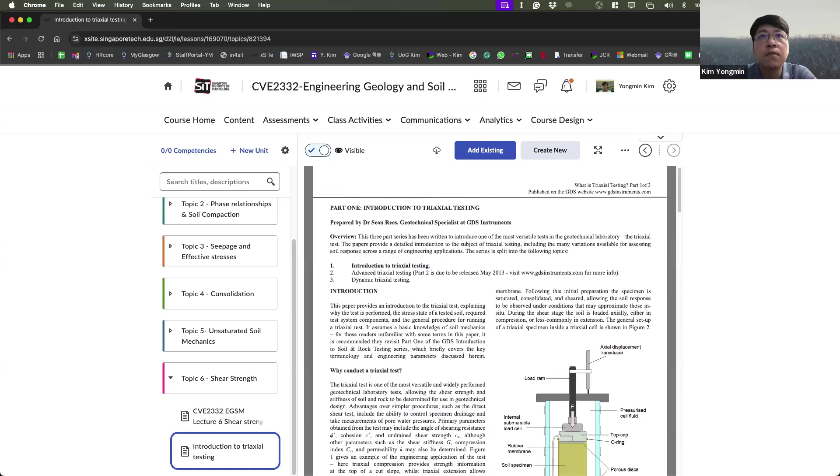Okay, let's begin our new topic: shear strength. So my question is, why do we care about shear strength most? Shear strength is one of the most important soil properties to control soil behavior in mechanics. This shear strength is required to estimate bearing capacity.

The shallow foundation failure mode looks like that, like sliding, right? And slope stability, this way, this way, this way. Tunneling and retaining walls all fail in a shear mode, shear failures. So this failure can be determined by the shear strength of the soils.

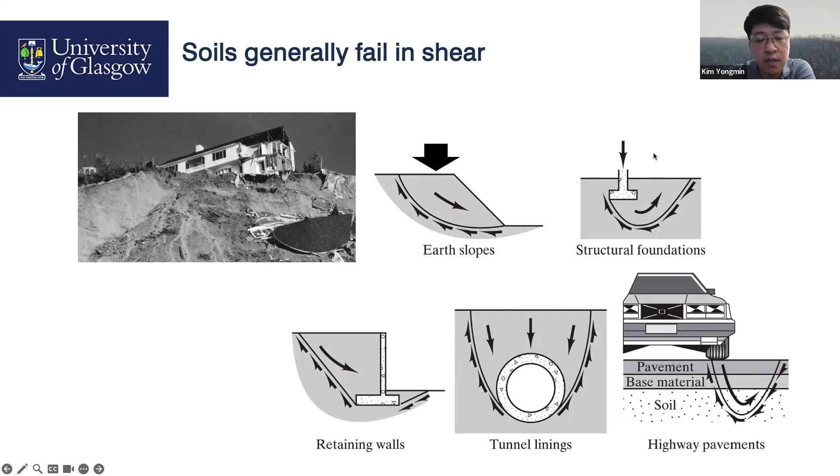Later on, we can take a closer look at this area. And then a very interesting thing in soil mechanics is the totally different behavior in soils compared to steel and concrete. This soil failure can be determined by shear strength with the incorporation of pore water pressures. But steel and concrete don't have any additional components to consider in their strength parameters. So steel and concrete behavior is very expected, but soils are quite unexpected. Uncertainties, we have a lot of abnormal behavior due to pore water, pore air.

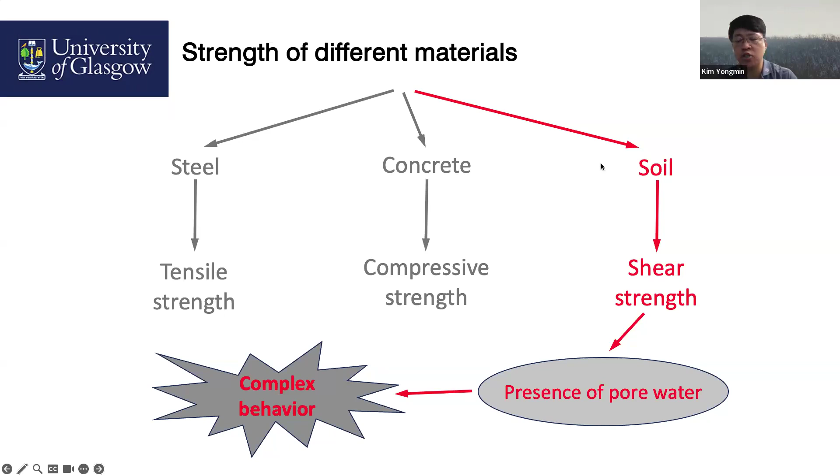So soil's shear behavior and shear strength is quite complex. Let's take a closer look at the failure surface. This is a theoretical failure surface and these are actual failure surfaces. Our geotechnical structures always fail in this way.

So you can see this resistance force against driving forces. They are in opposite directions. This soil mass tends to move this way, sliding, but the other way we have resistance force in the opposite direction.

Once they are balanced, this slope and this footing are very stable. But if the driving force is greater than the shear resistance, unfortunately, this slope and footing will fail.

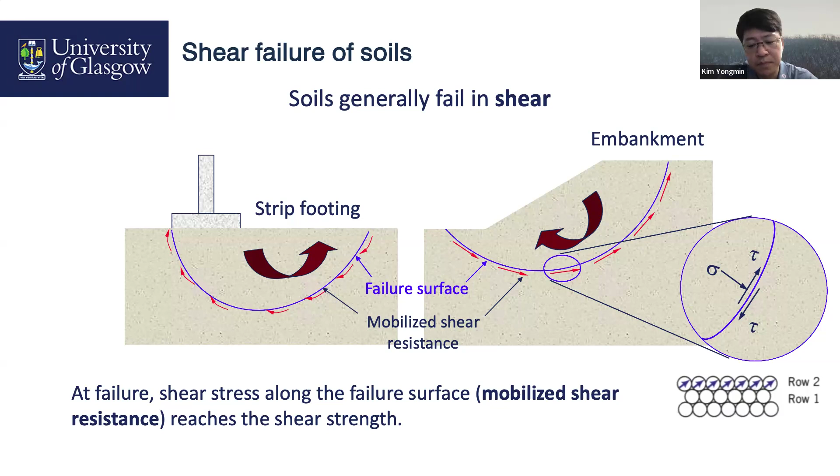Another geotechnical structure: the retaining wall. Yes, the next module of geotech is the geotechnical engineering module. You will learn about the design of retaining walls with respect to earth pressures.

This is soil, and this soil has self-weight. Sometimes we call this soil pressure, or earth pressures, acting on the retaining wall vertically and laterally. This retaining wall should resist such stresses and pressures.

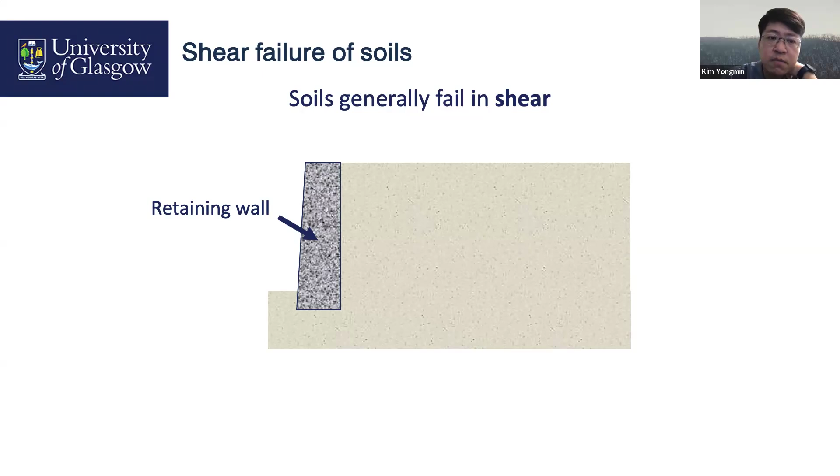Right now, the retaining wall resists certain loads from behind, horizontal earth pressures. Very safe. But due to external load, due to rainfall, or excavations, the retaining wall moves and shows shear failures, something like that.

This is a failure plane, and this is the driving force, and this is the resistance force.

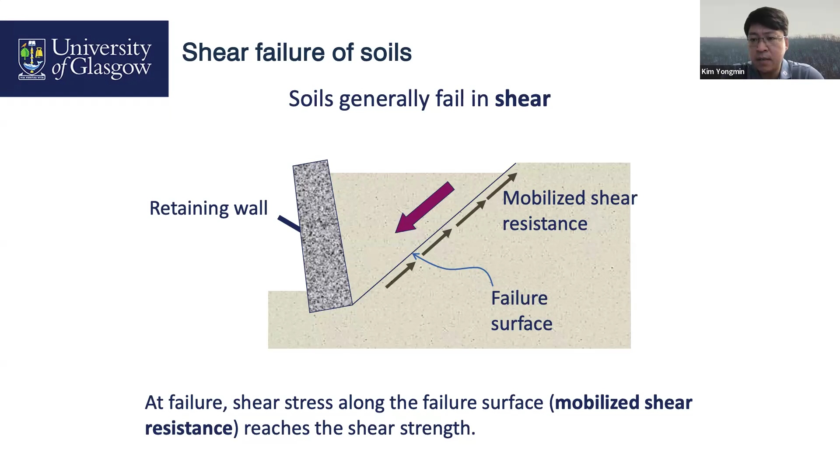Hi Prof, has this really happened in real situations? Yes, yes. I'm not very proud to say that if we don't really understand the earth pressures and certain retaining wall design and soil mechanics properties, major incidents will probably happen like this.

Inside is our construction site, outside is the residential area. But for some reasons, the retaining wall collapsed. It means these retaining wall structures couldn't withstand such pressures coming from behind the soil.

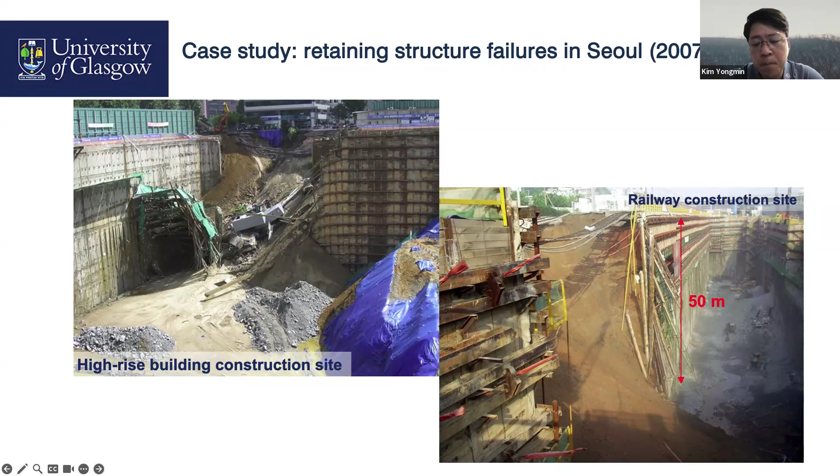We can visualize the earth pressures. This earth pressure looks like geostatic pressure. You know, geostatic pressure is vertical stress, right? Self-weight, your weight acting in the gravitational direction, which is mostly vertical. But horizontal earth pressure is lateral pressure, the resultant force of a triangular vertical stress distribution.

Probably our Korean designers omitted this magnitude of lateral earth pressures. That's why soil's shear strength always governs our safety and geotechnical structure safety.

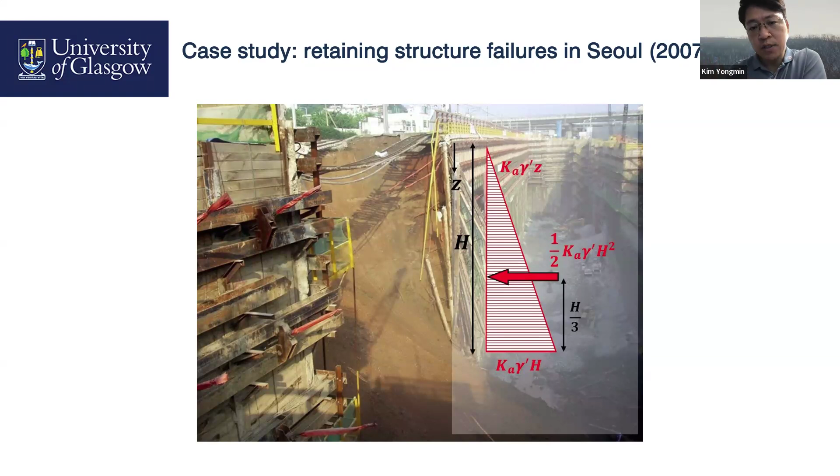How do we measure it? We have certain approaches. Before we explain the different approaches, we need to answer these questions. What did you say when you are asked, is soil a continuum or not?

Now, you attended physics and mathematics, right? All that theory is based on continuum mechanics. But our soil is quite discrete, so we couldn't apply continuum mechanics directly to soil mechanics. So sad. But we just make assumptions: soil behaves as a continuum material.

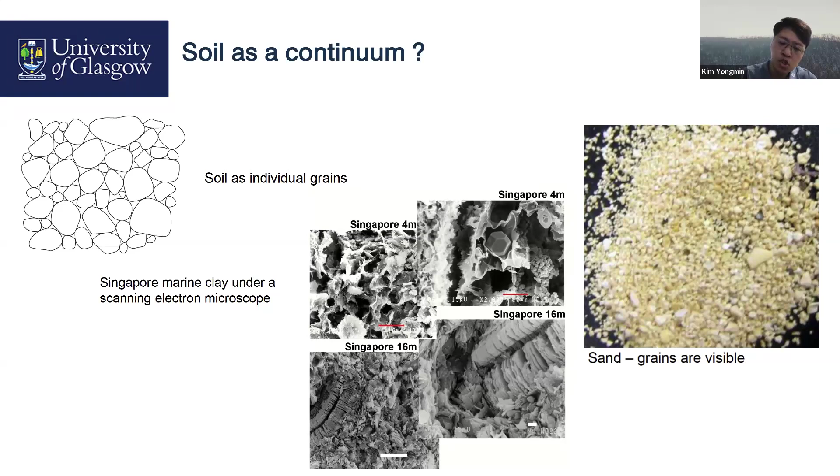In our soil mechanics, this sign convention is quite crucial for consistently defining our stress and deformations. Compression is plus, positive; tensile, tension is negative. Quite different from structural engineering, because our soil only resists compressive loads, and tensile resistance is significantly less.

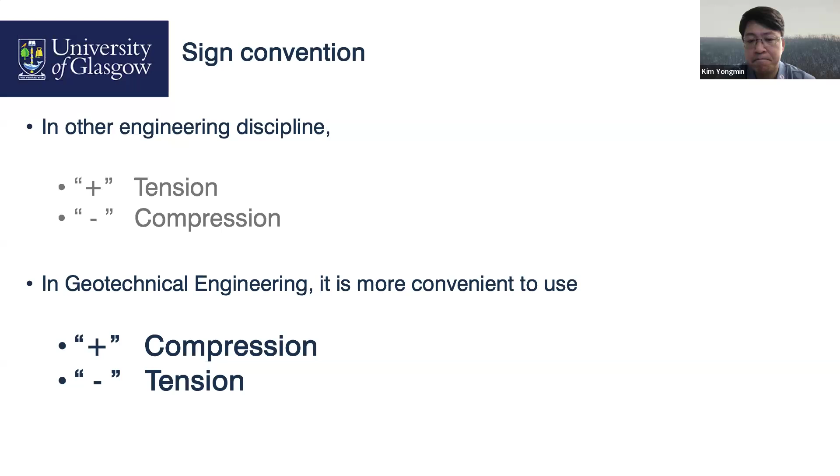So when describing soil's shearing behavior, we need to understand 5 different simple concepts. Don't take it too seriously, just try to understand. First one is

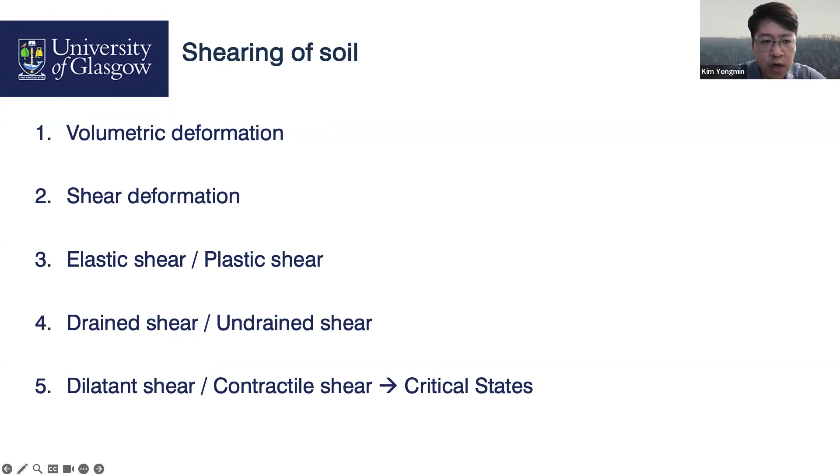volumetric deformations. Volume related deformations.

So just tell me whether this makes sense or not. I dive into a swimming pool. I felt some pressure, which is the hydrostatic pressure, right? And then due to this pressure, my cheeks, my head, decreased, contracted, but my body just remained constant. Does that make sense or not?

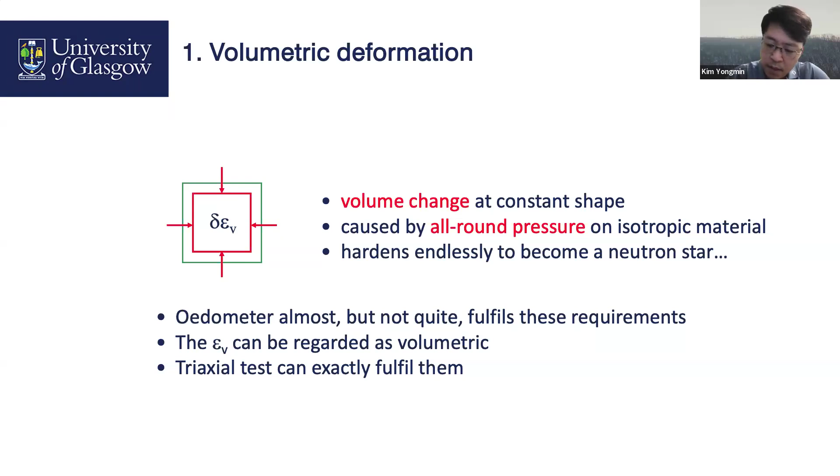Second is shear deformation. It refers to change in shape of the material due to applied shear stress without a significant change in volume. The volume remains constant, but I have a certain shear loading. The face shape is something different. Volume is the same, only the shape is different. In soil mechanics, understanding this shear behavior is essential for analyzing and predicting behavior of our soil under certain loads.

So you can see, apply a particular load, the red one is the deformed shape. How about rotate and press again? Shear deformations.

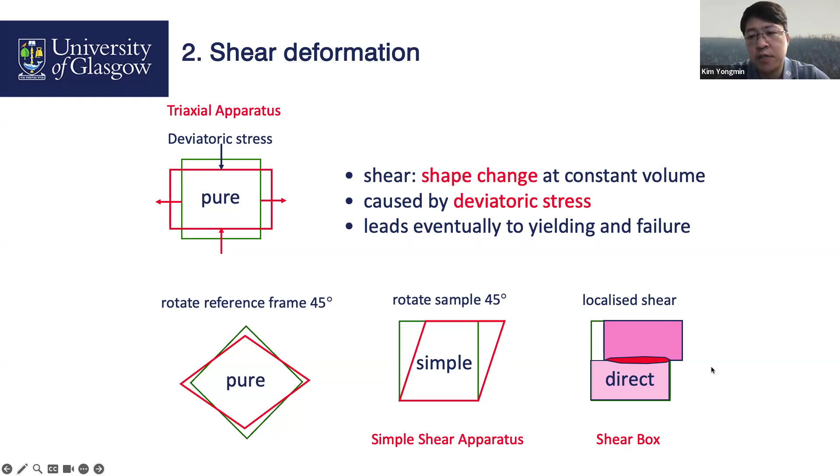This is also part of shear deformation, but in an elastic range and plastic range. Intuitively, you may understand, right? After removing certain loads, elastic behavior recovers back to original shape 100%, but plastic shear only recovers 90%, 80%. It depends on the soil's Young's modulus and Poisson ratio, right? I believe you may understand the elastic and plastic behavior.

You studied this in a structural module, right? Same. Yes, same.

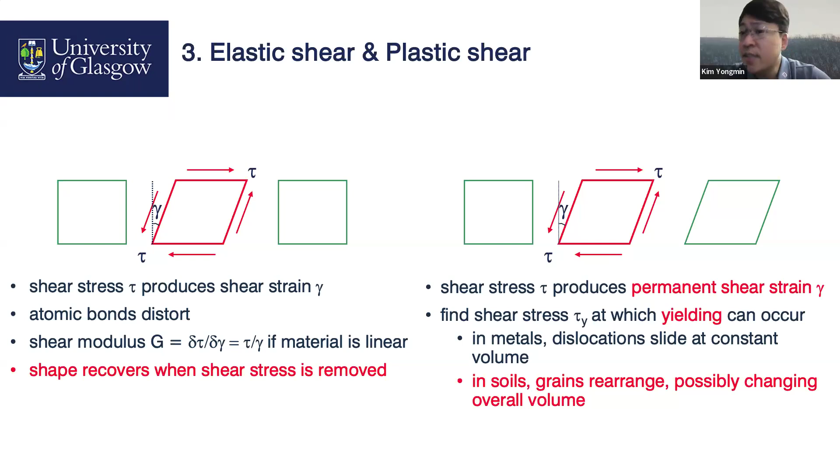And then, drained or undrained. Can you even understand what drained or undrained means? During the life of our geotechnical structure, we have to consider drained and undrained conditions to figure out real behaviors. So the decision on what shear strength parameter to use depends on whether you are considering short-term or long-term conditions. Your structure is temporary, or your structure is permanent.

The drained shear condition refers to situations where you apply pressure and the soil has time to dissipate it during the application of the load. It typically occurs in soil with high permeability or under slow loading conditions. Yeah, quite intuitive. Then we can

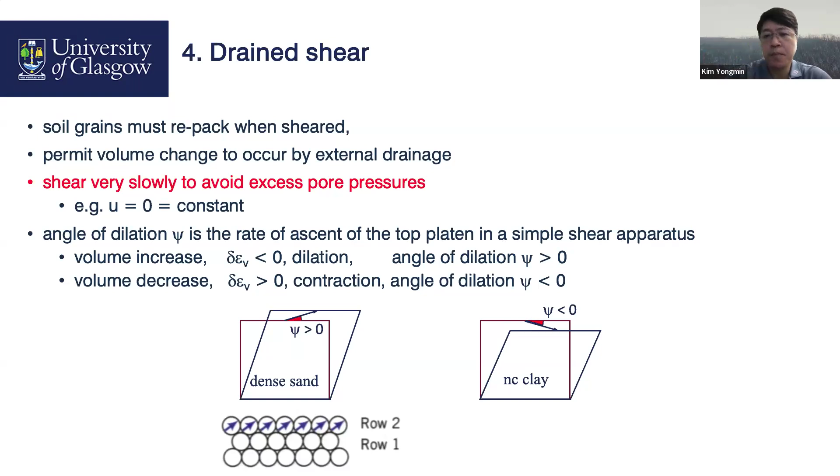On the other hand, in short-term conditions, soil with low permeability does not have sufficient time for the excess water pressure to dissipate. Our marine clay, even if you apply very slow pressure, there will be excess water pressure developed.

No choice, due to low permeability. And if you're loading quite fast, suddenly water pressure develops to resist your shock load. It means that you will have water pressure. That's all. On drained, you don't have water pressure. Undrained, you have water pressure.

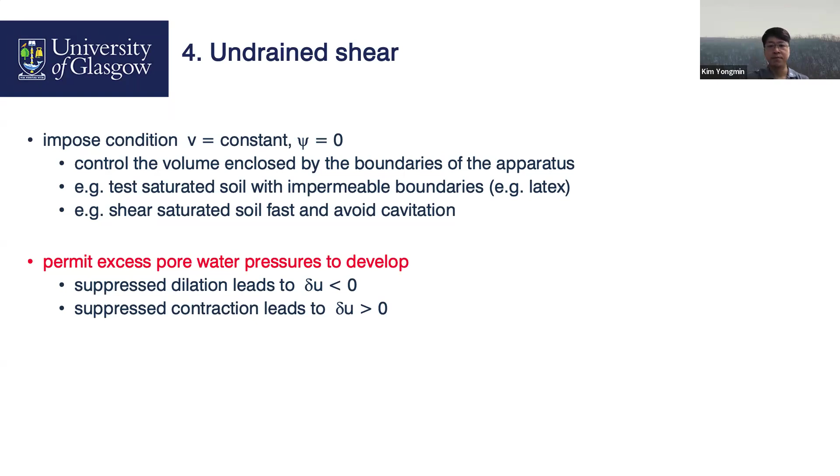Dilation is something like you gain weight, bulk up. Simply, this phenomenon is dilation.

When you take a look at the stress-strain relationship, if the soil's shear strain keeps increasing without any further shear stress increase, we call this the critical state. Your strain increases, but your stress increment is too small. It means the soil has already failed and just keeps failing further and further. This soil around this status is called critical state, a very critical state.

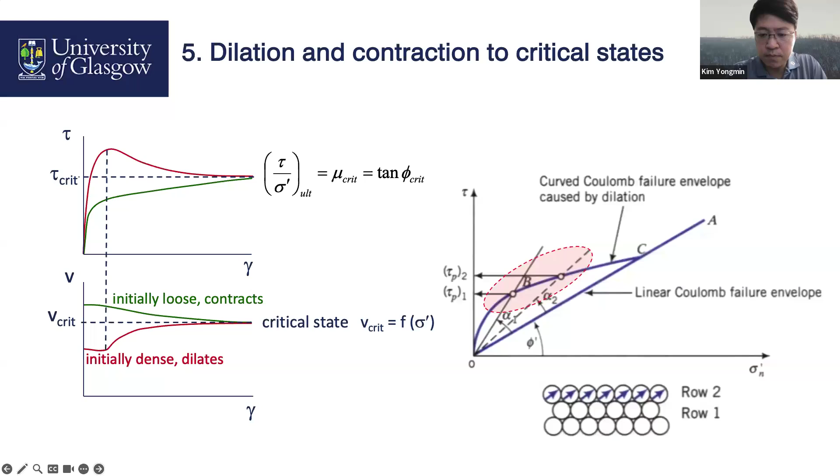When you take a look at the failure surface on the left-hand side, the particles have already rolled and slid against each other when the shear stresses are large enough. It means there will be considerable deformation with shear failure.

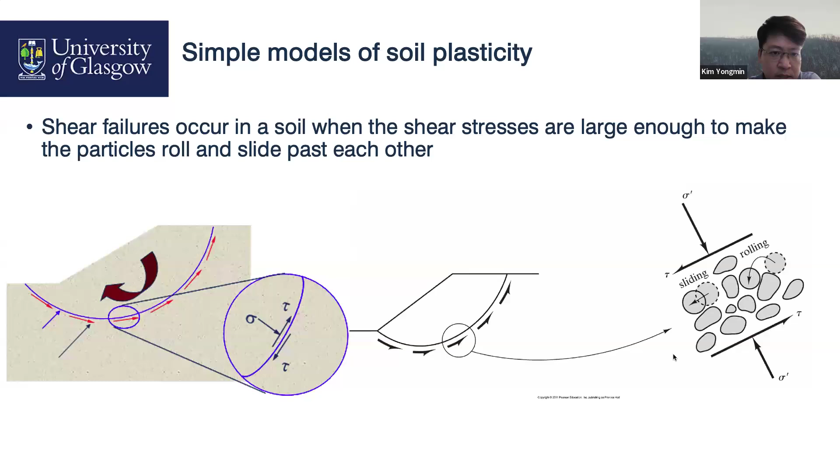Let's simplify the problem with physics. Here is a simple model for shear strength of soil using Coulomb's law. Have you heard about Mohr-Coulomb? Mohr is one researcher and Coulomb is another researcher. We utilize both theories to express soil behavior. One is Coulomb's friction law.

T is the horizontal force, N is the normal force. Mu is the friction coefficient of static friction between block and table, which equals tangent phi, the friction angle. The maximum friction resistance is mu times N. When the horizontal force is greater than this, the slip is initiated.

Rewrite the above equations in terms of stress while the block just slipped, and then we can express it this way. A is the area of the plane parallel to the external horizontal load. F denotes failure. This theory can be applicable to soil particles as well. Tau is shear stress, sigma is normal stress, and we have certain relationships.

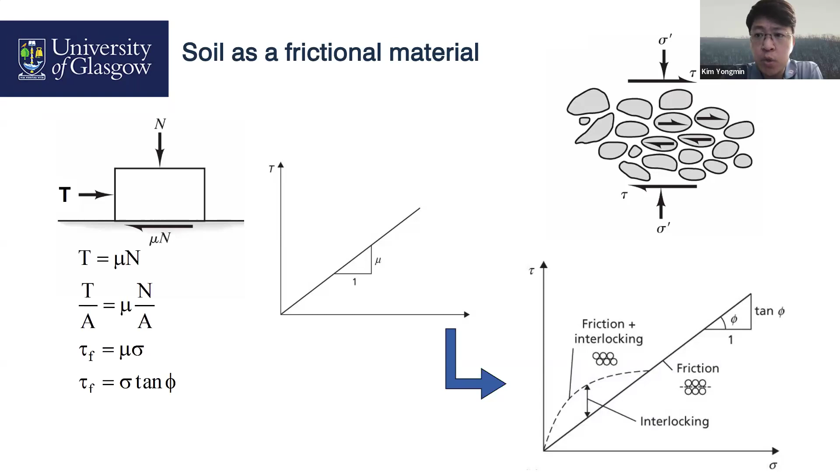Mohr and Coulomb define this failure line. That's why in soil mechanics, the Mohr-Coulomb model, so-called MC model, is widely used to capture soil's failure behavior.

This is another plane, same axes, shear stress and normal stress. Right now I'm starting with point A or point B. Then loading is just applied. My stresses, normal stress and shear stress, develop. So assume this point and this point, these points. We follow this track, the total stress path, and then we follow this track, the effective stress path.

Hey, what is the difference? Developed pore pressures. I will explain later on.

Under this failure line, we have a lot of circles. Researcher Mohr proposed this theory: all stresses in soils represented by a circle, so-called Mohr's circle. We have hidden circles here too. Currently my circle is here, but as stress increases, the circle's radius and diameter increase, and it just touches this line—we call that failure.

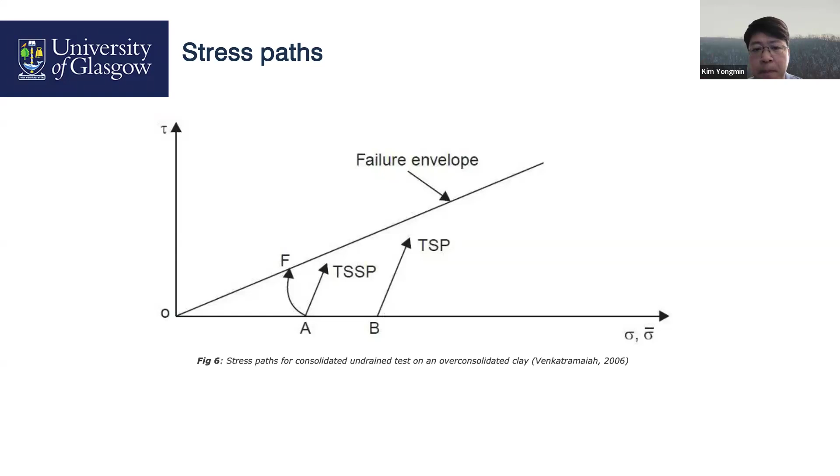Yes, we need to find out these combinations. So, Mohr and Coulomb—Mohr represents a theory for rupture in materials: a material fails because of a critical combination of normal stress and shearing stress, not from either max normal or shear stress alone.

This is Mohr's suggestion. Coulomb assumed that it is sufficient to approximate the shear stress on the failure plane as a linear function of normal stress. So Coulomb's law requires the existence or development of a critical sliding plane, so-called the slip plane or failure plane.

So still we have the same axes, shear stress and normal stress, and the straight failure line. The C is cohesion. Phi is the internal friction angle. Sigma is the normal stress on the failure plane. Tau F is the shear strength of soils.

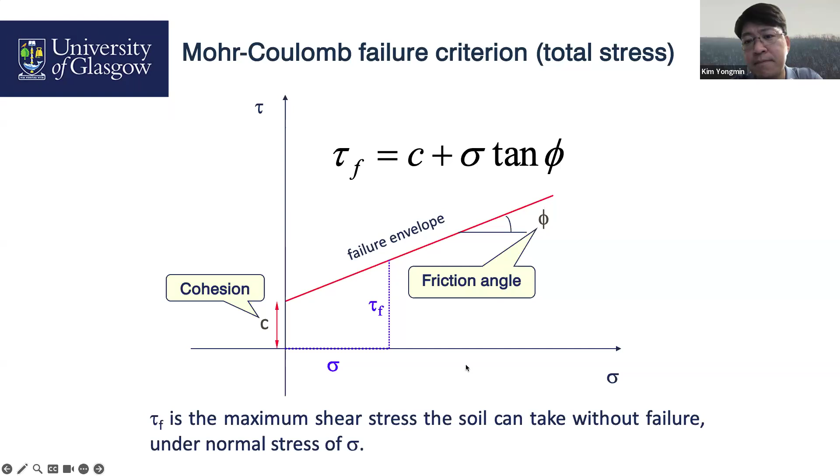In a saturated soil, the total normal stress at a point is the sum of the effective stress plus pore pressure, right? So the effective stress is carried by the soil particles, and the MC criterion can be expressed in terms of effective stress as well.

Keep that in mind—we have a lot of hidden circles, which I will show you later. So this point from here to here is C prime, and from here to here is sigma prime tangent phi prime.

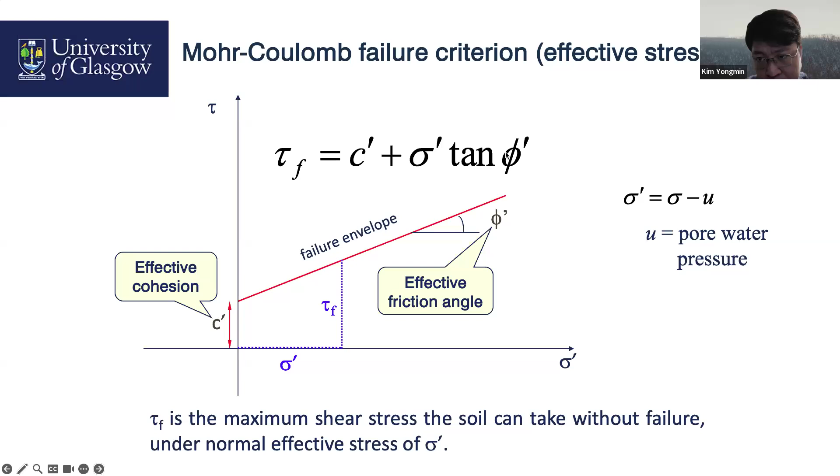Yes, C prime plus, from here to here, sigma prime tangent phi is this height. So this equation is the expression of shear strength, comprised of cohesion, friction angle, and normal stress.

The value of C prime for sand or inorganic silt is more like zero, because sand is something like a no-cohesion material, right?

For normally consolidated clay, C prime is also approximately zero. Over-consolidated clay has a value of C prime. This internal friction angle phi prime is sometimes referred to as the drained friction angle. Typical values of phi prime for granular soils range from 26 to 45. So again, cohesion component here, friction component here, and it's linear.

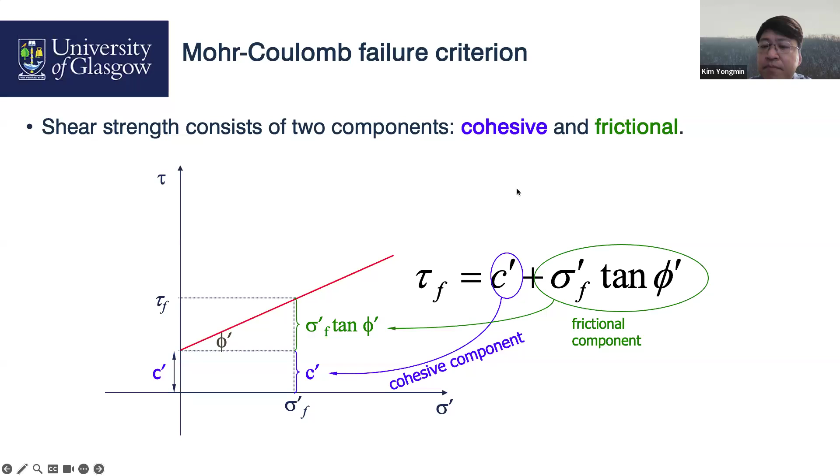A little bit different perspective. I express the Mohr-Coulomb model in sigma 1, sigma 2, sigma 3 axes, and their failure shape is something like this, with a specific sharp point.

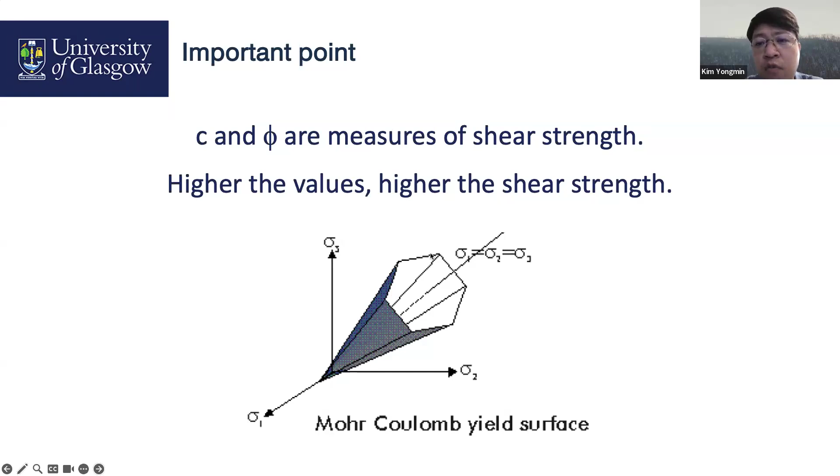So when you select the MC model in your numerical simulations, sometimes your stress at this corner doesn't know where to go, here and here. That's why there should be some error. So numerically, we implement this model with a bit different shape, a curved shape rather than a sharpened shape, just for your information.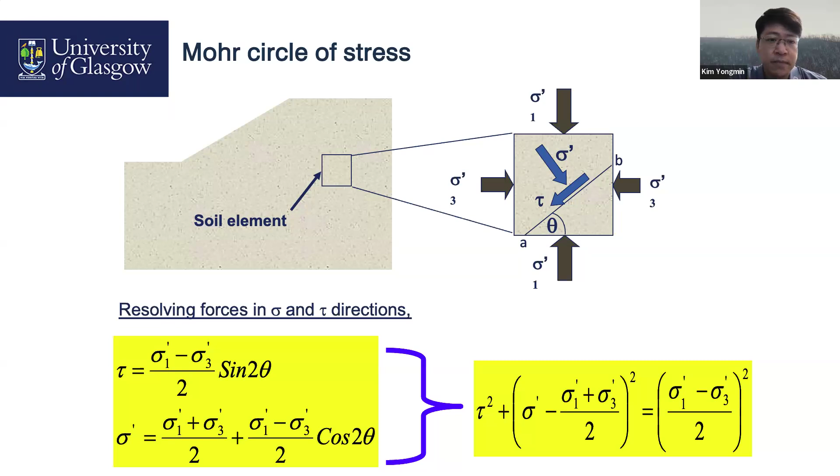Same stress, soil element: your external load, and you have internal stresses, tau and sigma. Let's draw a circle for this stress state. Here is sigma 3, the minimum, and here is the additional vertical load, so sigma 1 is greater than sigma 3. Then we draw the circle with diameter equal to the difference of sigma 1 and sigma 3.

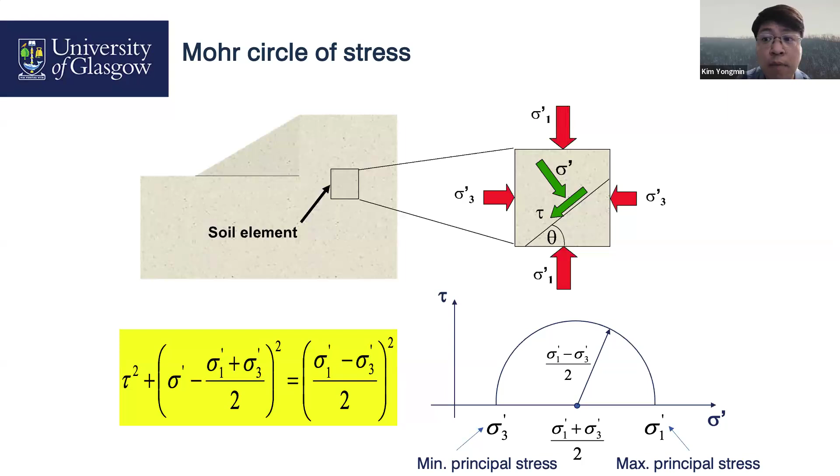These stress conditions are represented by this Mohr circle. That's all — this is the Mohr circle. And then Coulomb proposed a straight line, right? Oh yes, a straight line.

After heavy rain, this slope will fail, sliding right to left, and your soil resists left to right. This is a potential failure line — only this line will fail. This element location, Y location, looks stable, right? Why? Because only this area fails.

So your Mohr circle for this element's stress state is something like that: sigma 3, sigma 1. Draw the circle, but this circle hasn't reached the failure line yet. But when you look at the failure line, even though your sigma 3 is small and your sigma 1 is only a bit greater at X, your stress combination already touches the failure line. That's why this X location fails.

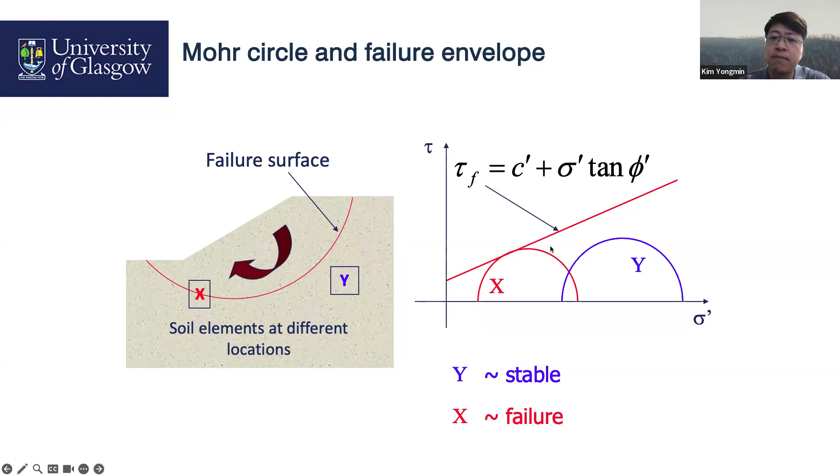Let's consider simple plain ground conditions. Sigma H is confining pressure, which is sigma 3, and vertical stress, which is sigma 1. With sigma H and sigma V, we draw the circle. Okay, very happy.

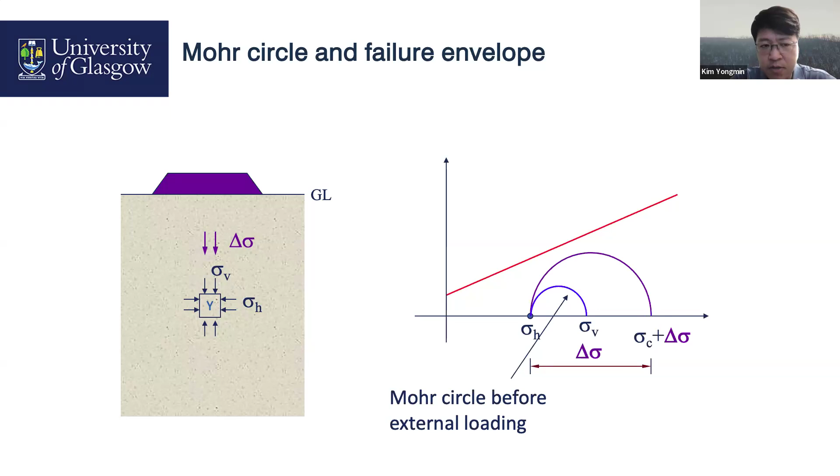Apply a surcharge — I don't know why, but your contractor dumped soil mass, so your circle increases. 'Wow, hi prof, this still hasn't reached the straight line yet.' Correct, correct, your soil is still safe. This soil element does not fail if the Mohr circle is contained within the envelope.

But keep on increasing — your Mohr circle keeps increasing, and eventually it touches the failure envelope.

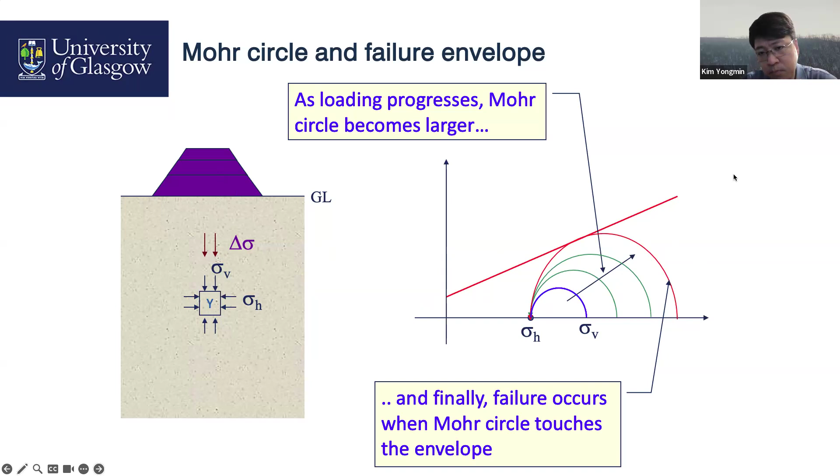This slide explained total and effective stresses. Every stress state can be represented by a Mohr circle. This is the total stress, sigma H, sigma V, total stress. But since this soil is fully saturated, there should be some pore water pressure. This is the pore water pressure.

Sigma V minus pore water pressure is effective stress. We have another Mohr circle. This circle represents effective stress, and this Mohr circle represents total stress. Total stress includes pore water pressure, so total stress equals effective stress plus pore water pressure. This stress state is represented by this Mohr circle.

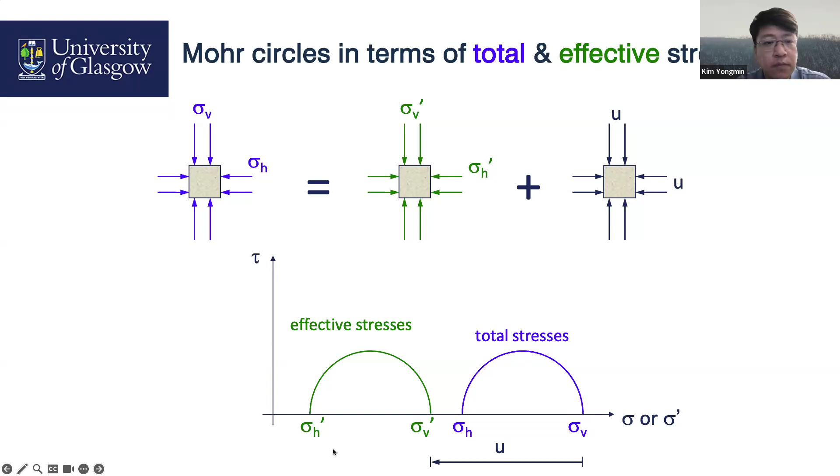Then we can draw the straight line, just touching our Mohr circles. That's why it's called the Mohr-Coulomb model. This is the failure envelope for total stress, and this is the failure envelope for effective stress.

Almost there, sorry, just focus.

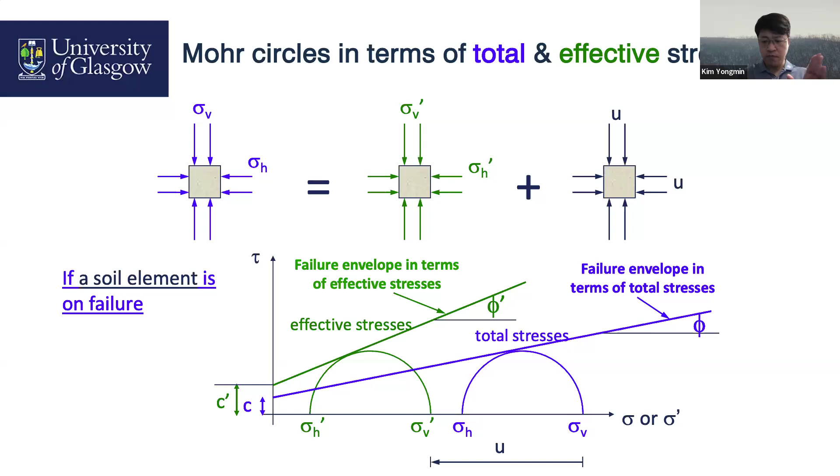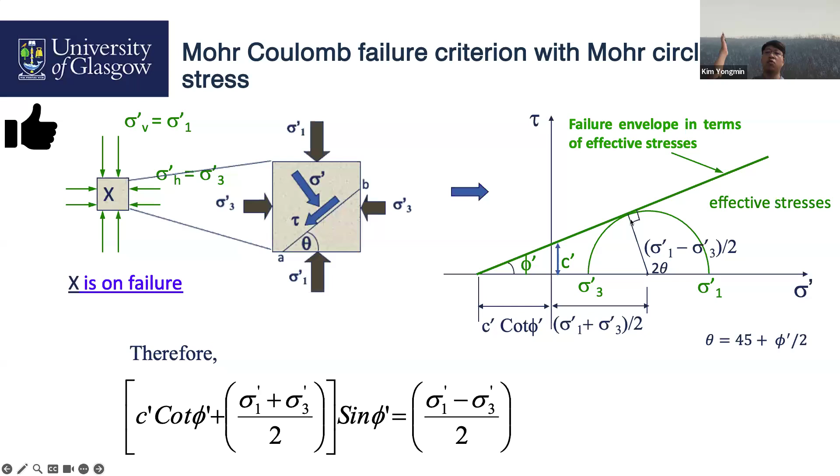And we can also convert this equation into principal stress, sigma 1, sigma 3, and c prime, phi prime.

Again, I'm not testing your memory capacity, just make sure you understand how we get this. Then you solve this equation - not quite solve, but move parts to the left, to the right, and rewrite the equation, yielding these equations according to this process. Just give it a try after these lectures, as a reminder of your mathematics fundamentals. Simply get these equations.

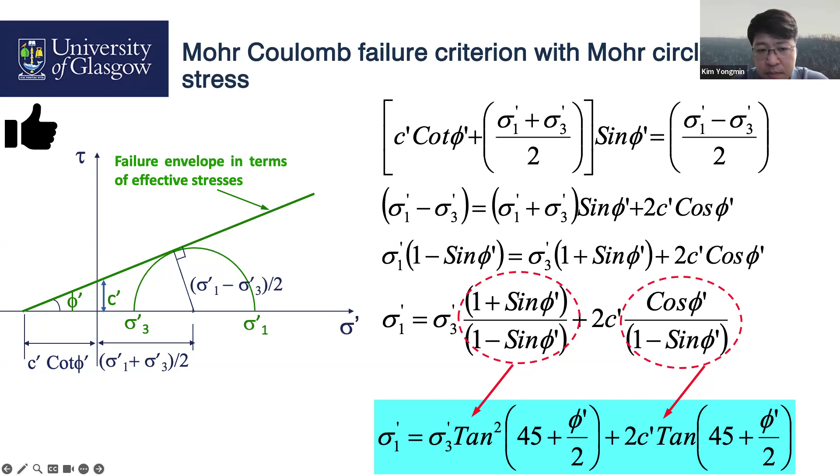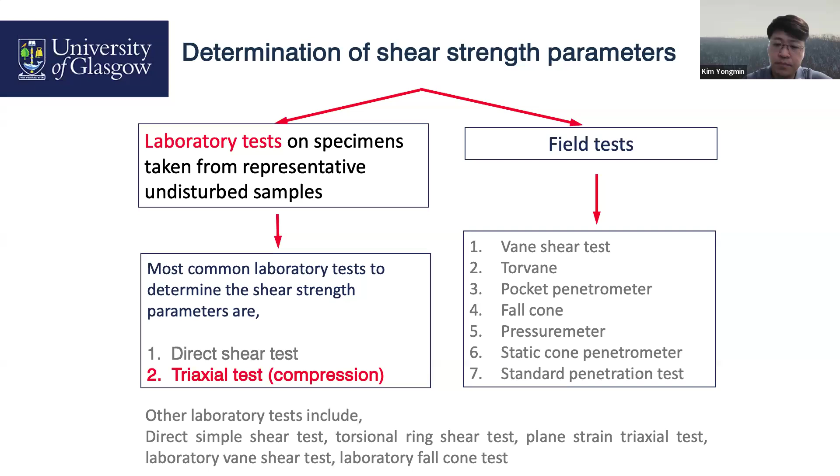How do you know the horizontal stress? We have a horizontal coefficient, mostly 0.5. In your geotechnical engineering module, you may study retaining walls, which involve lateral earth pressures. How do you get this lateral earth pressure? From the vertical effective stress, times coefficient of lateral earth pressure, ranging from 0.4 to 0.6, but now assume 0.5. So this whole condition is the natural geostatic stress.

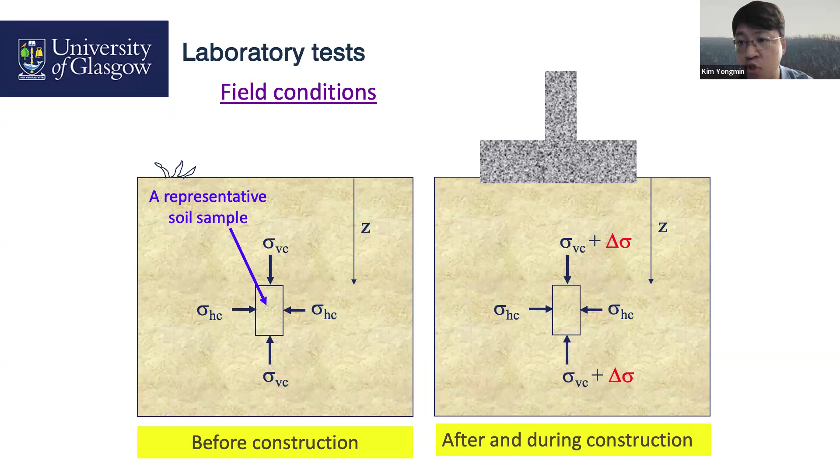But putting in shallow foundations means my vertical stress increases. And then in order to design this shallow foundation, we need to know shear strength as it is. It means that in your laboratory, you copy this stress condition in your lab, right?

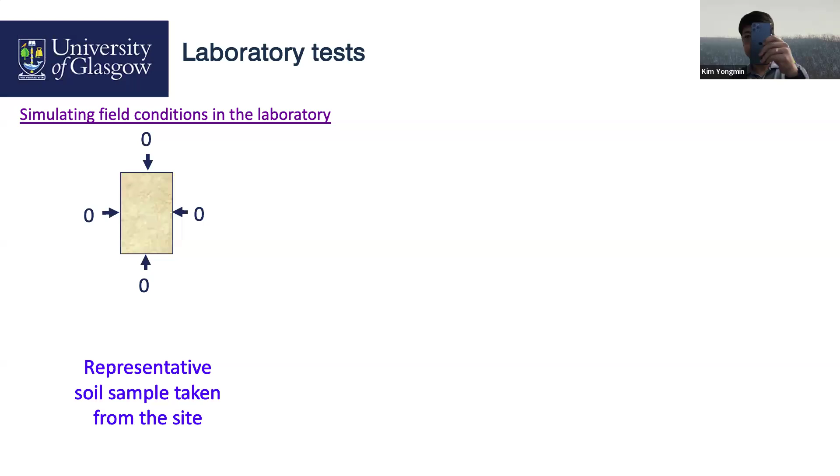So right now, I take a soil sample - now no pressure, only air pressure, right? Now in the lab, just this condition, just this condition. And then apply confining pressure, geostatic pressures. Then what's next?

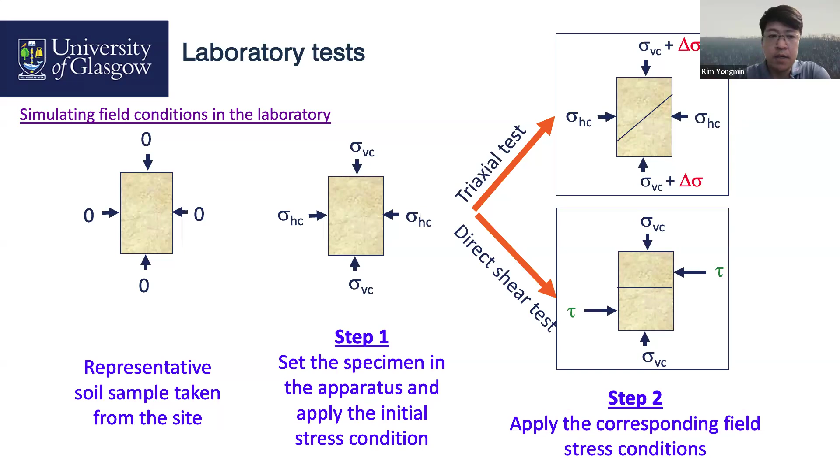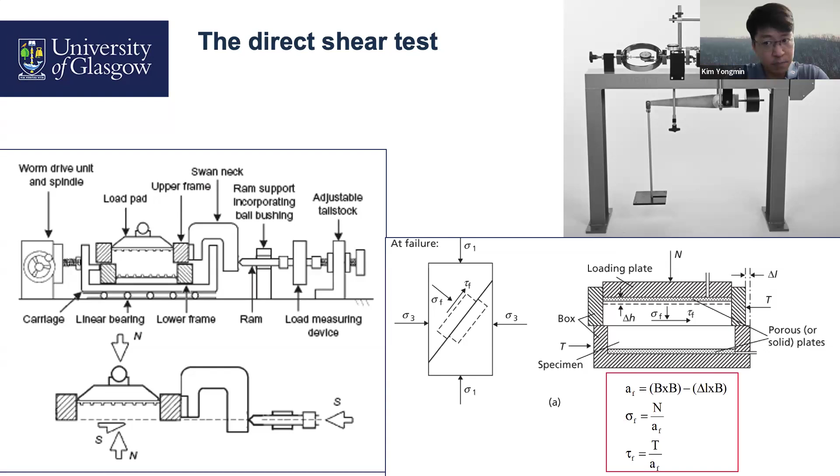First one is a triaxial test, second one is a direct shear test. In our direct shear test, we have certain equipment. We prepare our soil specimen and then we can force push to get our soil failed. Very simple. And then we follow BS, ISO, ASTM standards.

And then we also control the loading rate - slow or faster? How do we know? According to testing standards: British Standard, International Organization for Standardization, and American Society for Testing and Materials, something like that.

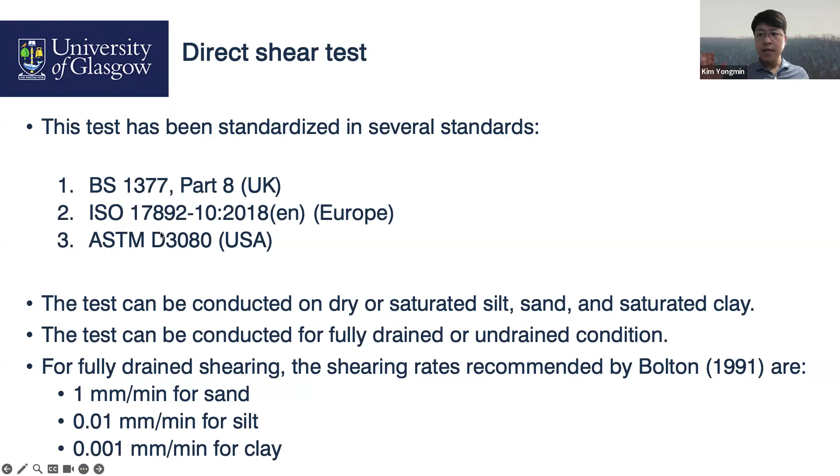Now I'm happy to share with you triaxial shear tests, so-called triaxial tests - one of the most reliable methods available for determining shear strength parameters, C and phi. It is widely used for research and design practice.

So we prepare a soil sample with specific dimensions according to standard. This soil sample is encased by a very thin rubber membrane and placed inside a plastic cylindrical chamber that is usually filled with water or air to apply confining pressures. Our school equips the machine with air pressure, so we can apply cell pressure - just apply air inside the chamber, and that pressure acts directly on our soil sample.

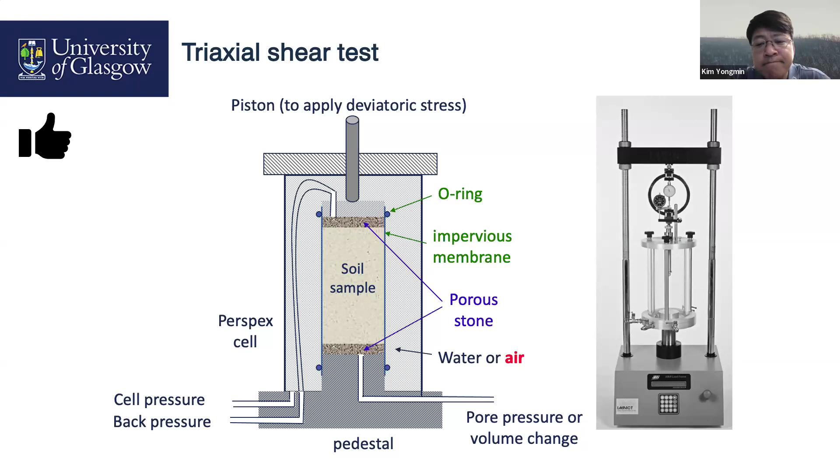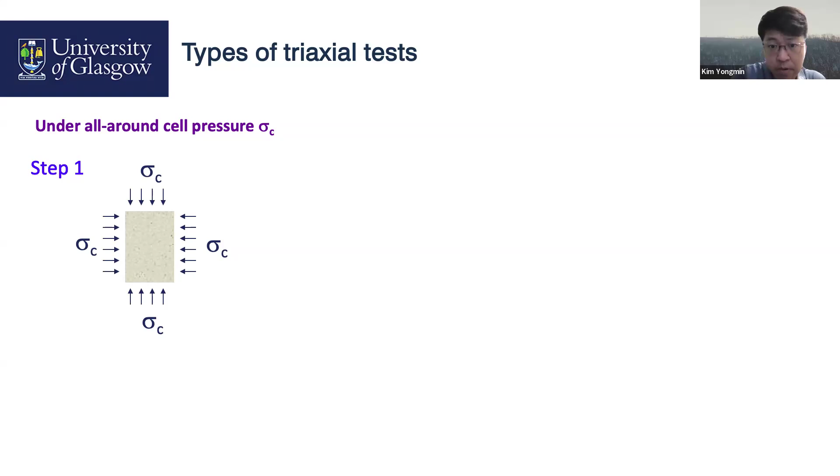The specimen is subjected to confining pressure by applying air pressure in the chamber. In these stages, we can decide whether to open the drain valve or not while maintaining confining pressure. Once you open it, it is consolidated; closed, it is unconsolidated. Consolidated means water drains out—if you open the valve at the bottom, water drains out, so it's consolidated. But when you close the valve, water cannot be drained out, so it's unconsolidated.

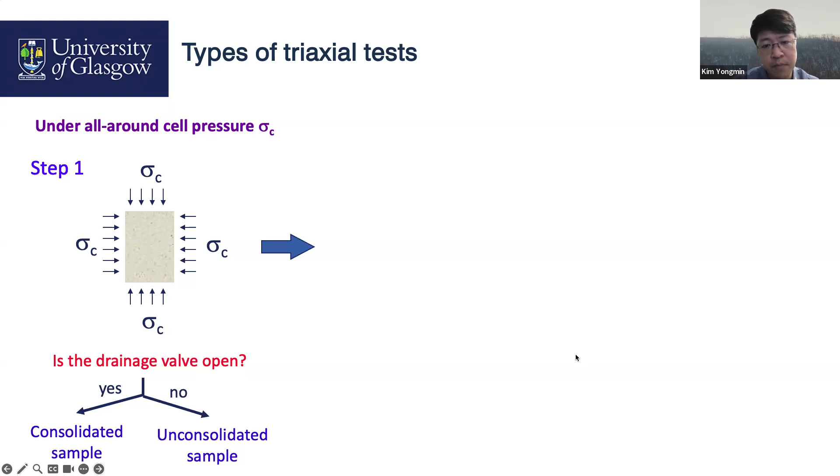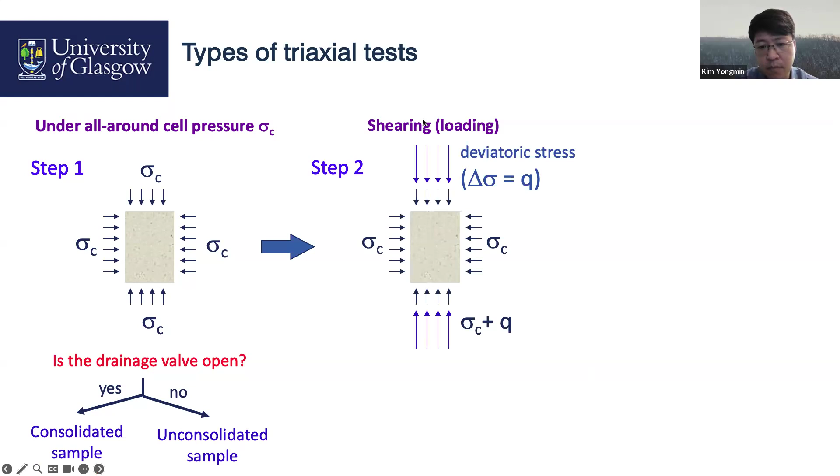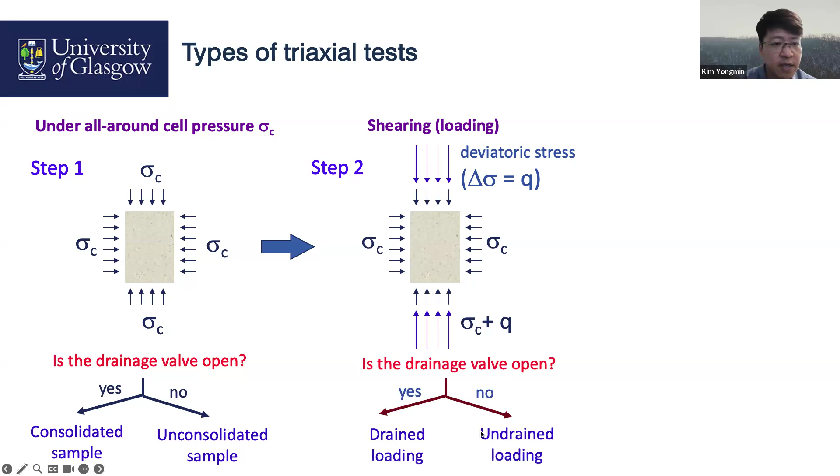Secondly, to apply shear stress on top of the soil sample, we must apply axial stress—external loading, normally called deviator stress. In this case, we can also decide to close or open the valve, giving us drained or undrained loading conditions.

At failure, we can observe the failure line. This is a real testing result—you see your soil sample, apply load, and it slides down along this failure plane, exactly as we just discussed. This stress status can be drawn in terms of a Mohr circle.

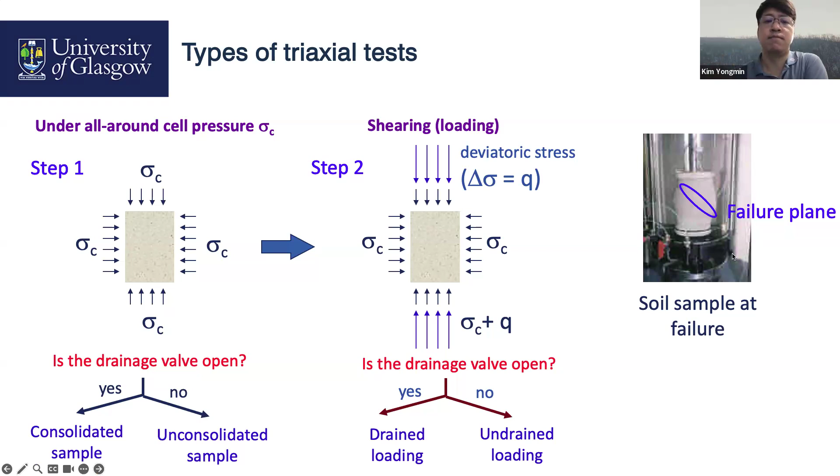So, in summary, we have two steps. First, open valve or closed valve—open is consolidated, closed is unconsolidated. During the consolidation stage and the shearing or loading stage, you can also open your valve for drained conditions, or close it for undrained conditions.

So: consolidated drained condition is the CD test. Consolidated undrained test is the CU test. Unconsolidated undrained condition is the UU test. We have three different types of tests, and I will ask you to explain the details of UU tests, CD tests, and CU tests.

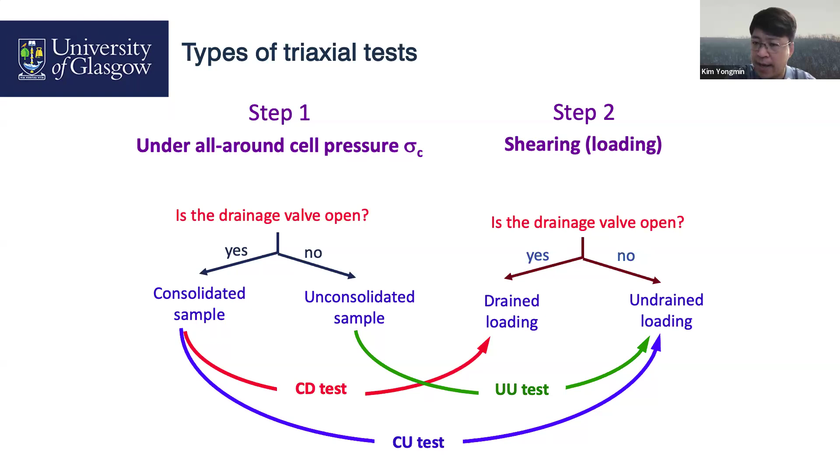Triaxial tests follow a specific standard. Today I will explain the CD test first, then stop and continue next week, because the mechanism is all the same. So I will ask you to think through the remaining two tests, CU test and UU test, according to what I'm about to explain right now. Let's begin.

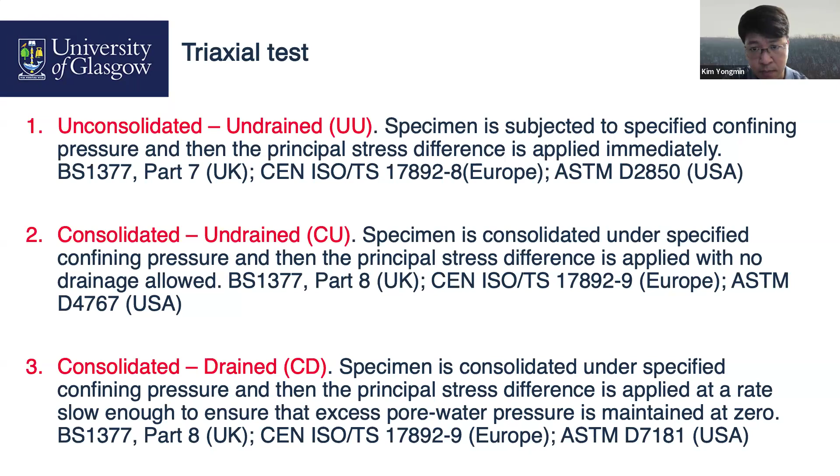CD test: consolidated drained condition. Total stress equals effective stress plus pore water pressure. Okay, let's begin.

This is the consolidation stage—apply load, confining pressure. My valve at the bottom is open, so during consolidation, water drains out. This means your water pressure is zero, which means your effective stress is exactly identical to what you just applied. So now it's total, but with no water pressure—it becomes effective stress during the consolidation stage.

After consolidation, we apply the shear load, which is the shearing stage. We only increase the vertical load, but keep the valve open. I'm expecting that due to this loading, there should be some excess water pressure. The soil is already saturated, so applying additional load generates excess water pressure, but since the valve is open, the water pressure stays at zero—so your effective stress is this plus this.

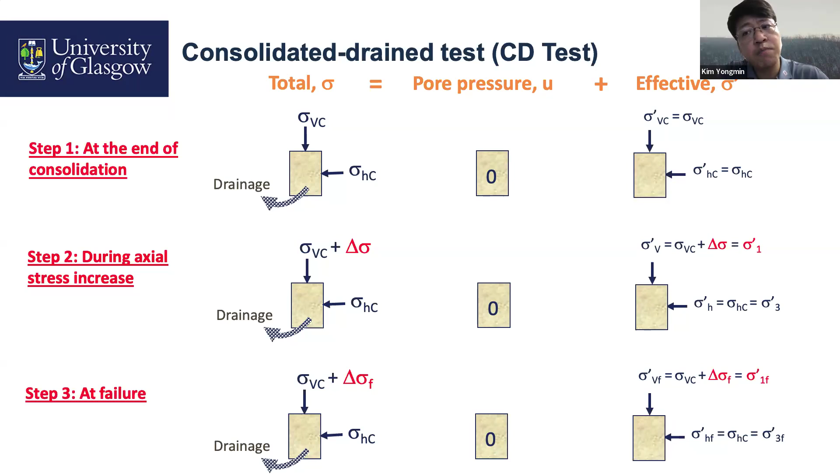No. What we have to keep in mind is that we manage to get the soil specimen saturated before the consolidation stage and the shearing stage. How do we make our soil saturated?

Can you remember back pressure? Back pressure is the injection of water into the soil specimen. So we just inject back pressure into the soil specimen—this is soil, I inject at the top, the valve is something like that, the line is connected here and we inject water. So water keeps getting injected inside. What would you say—is the soil sample stable or unstable? Only applying back pressure, your soil will fail. This is the specific steps to make our soil saturated.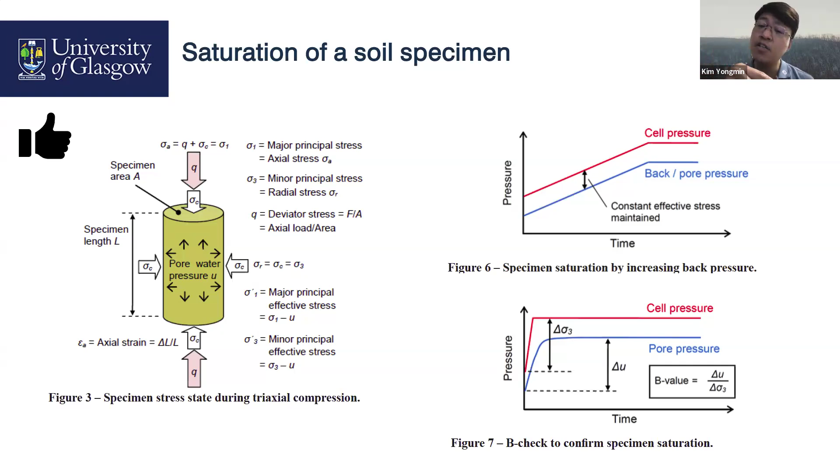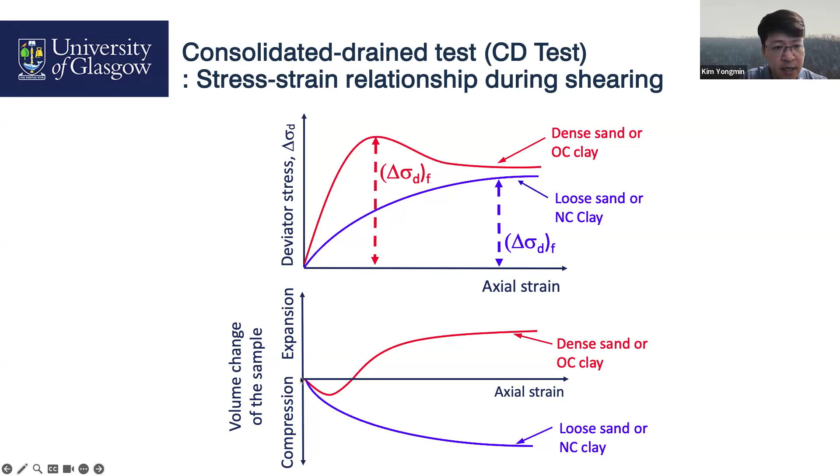After considering these circumstances, you choose the type of test. So today I just explained to you the CD test, consolidated drained test. So after these tests we will get some soils showing compression only, and as mentioned before, for a dense one we get a peak value and then it decreases, contracted and then dilated. And mostly we conduct several tests at different confining pressures to get a more complete failure criterion.

Let's say you have only one test. How do you draw it? We have a lot of options to draw a straight line, but at least you need 2 to 3 tests to get a unique failure criterion. This line touches all the circles.

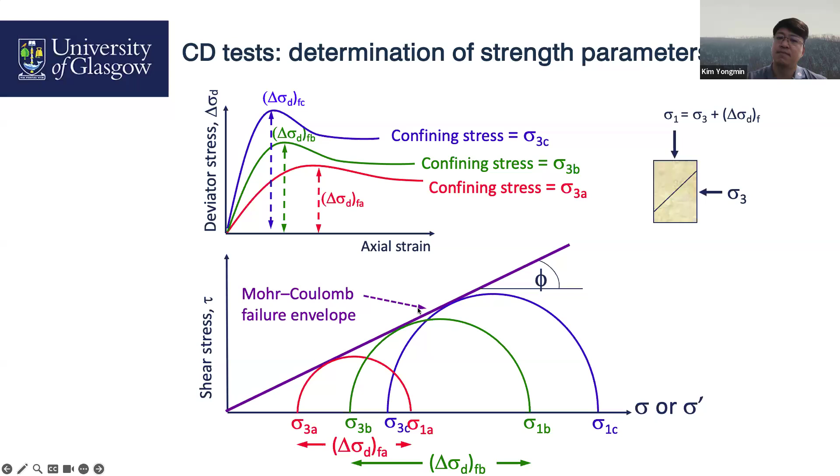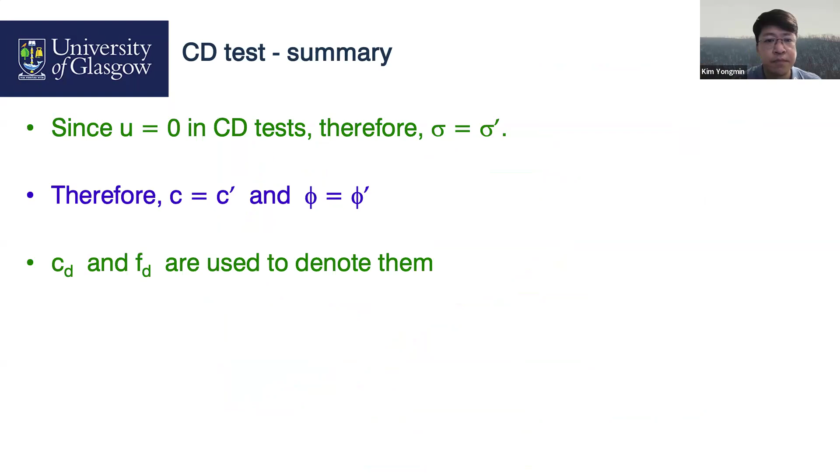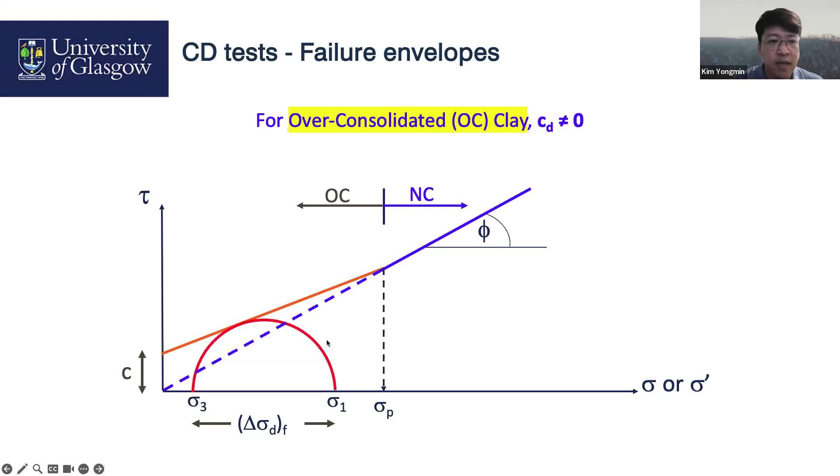So from the CD test we will obtain the effective value, C prime and Phi prime. We can't measure water pressure because we open all valves. This is the typical normally consolidated behavior, this is the overconsolidated behavior. Once we obtain C prime and Phi prime from the CD test, we will use them for embankment or slope stability analysis.

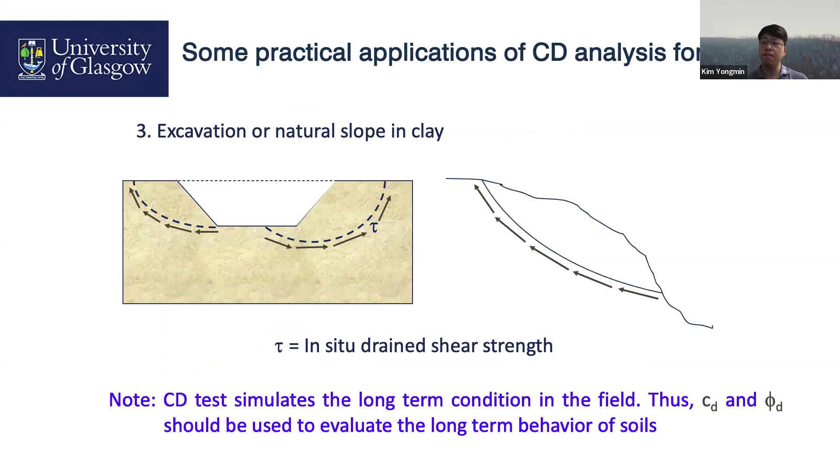I will stop here, then try to explain. Just as an assumption, my second quiz question is: please explain the CD test. How do you explain it? You have to draw this graph and these equations.

Yeah, next week I can continue where we left off. And before that, try it yourself.